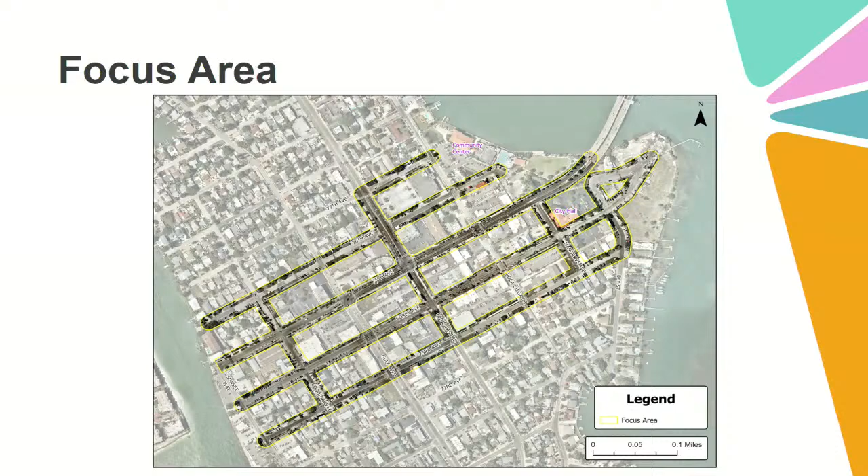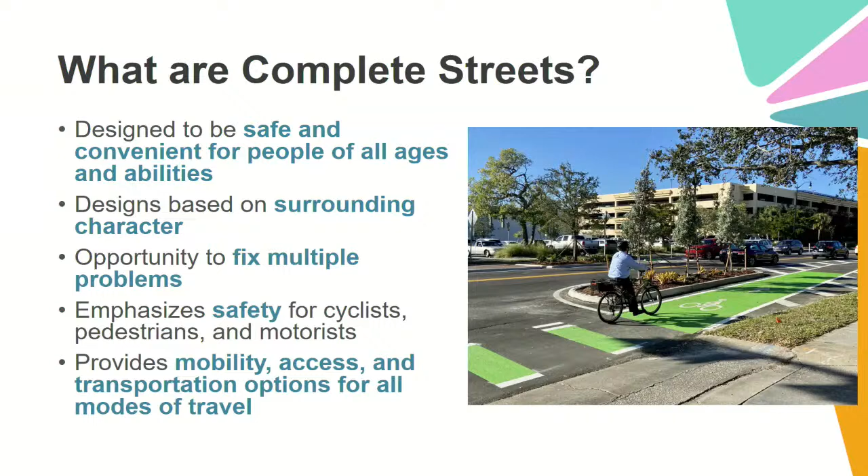Let's see, what are complete streets? So complete streets are just, they're safe and convenient modes of travel. We're looking to prioritize safety, particularly for cyclists and motorists and people of all ages, so the elderly or families, anybody who might be traveling on a street. Make it more cohesive, not just for vehicles, but also including vehicles in the safety as well.

Our project schedule, we started in December of 22. We worked through 2 community workshops so far and 2 stakeholder workshops to get resident feedback. And then we're finally at the point where we're drafting these final recommendations. We're looking to take this to the commission probably around December or January of next year.

What we've heard so far from the community: particularly on local streets, they would like slower speeds or traffic calming, more 4-way stops on these local streets, particularly on Coquina Way in our project area. They were requesting more 4-way stops, more dedicated bike routes, bike and scooter parking, improved sidewalks, and then more on-street parking, which I think is an issue that spans the whole of the island, but in this area too it came up.

And also something that was interesting that came up was more native landscaping. After the most recent hurricane, a lot of the landscaping got wiped out due to the salt water, so they were thinking more resilient landscaping that could stand the test of time.

So one of the deliverables that Kimley-Horn provided to us is a complete street toolkit, broken down into 6 different areas: the streetscape, the pedestrian, intersections and crossings, bicycle and micromobility, roadway and traffic calming, and then placemaking.

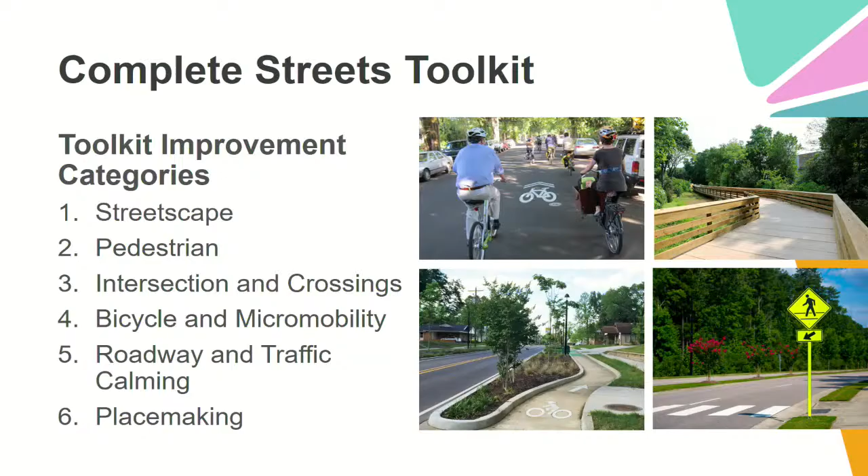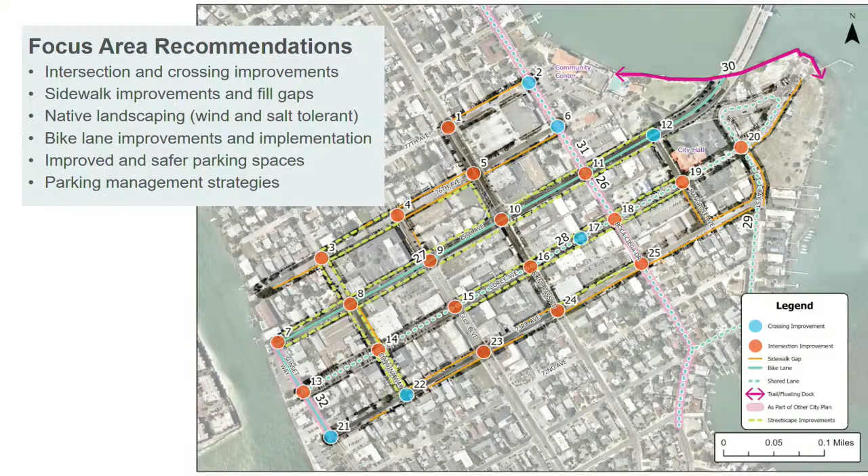They gave us a map that focuses all of those recommendations onto the project area. So most of our intersections need improvements. A lot of our sidewalks need improvements, things that you would expect to see. But they also gave us some interesting ideas for placemaking and landscaping where we could add strategic complete streets ideas to really make the streets better for everybody.

So now I want to go into the street concepts. That's the handout that I have for you. We tried to make templates that could be implemented on any of the streets in the area.

So what I have for you is this concept for 73rd, Corey Avenue, and 75th. But you don't need to think of them in the context of just that street. Think of it more as this idea could be implemented anywhere on any street that has a 60-foot right-of-way or an 80-foot right-of-way. So it's not that the plan will only be applied to Corey, or that we're looking to go out with a shovel and start digging up the roadway to implement this exact plan. It's just a high-level concept.

So the first one is 73rd. Our existing conditions on 73rd: we have 5-foot sidewalks on both sides, 12-foot travel lanes. We have some 90-degree parking existing in the right-of-way, so it's actually in the city right-of-way, though some people do have driveways and off-street parking. We have 36 existing parking spaces, but many of those block the sidewalks that exist.

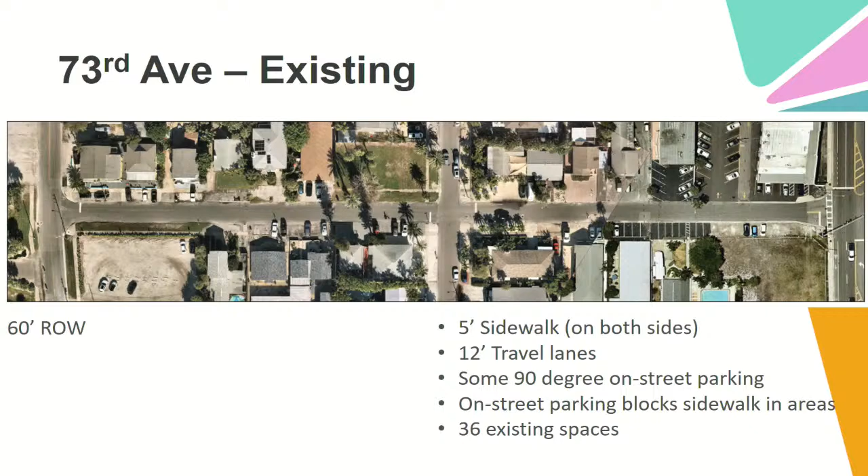So the first option is a two-way street concept for 73rd Avenue. This keeps it two-way like it is today, but it formalizes the on-street parking that exists. You can see that we actually gain 2 spaces by doing that, so we go from 36 to 38 spaces. We also ensure that those are up to code, so there won't be cars hanging into the roadway or blocking the sidewalks.

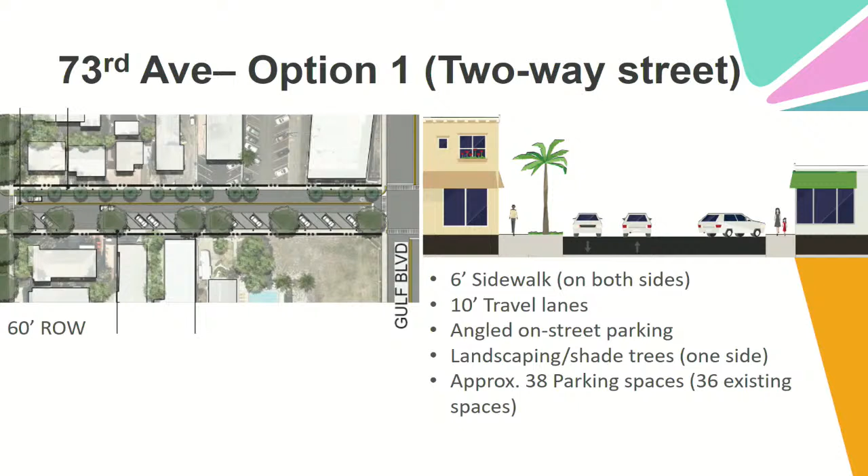It'll improve mobility overall. The second option we have is a one-way street. We did a lot of asking around when we proposed this option to the community, and we've gotten generally favorable feedback, some negative, some positive, but overall people are curious about it, interested in it, and it seemed to be well received. This takes out the extra lane, reducing the travel lane to one 10-foot lane, and adds more on-street parking, so we go from 36 spaces existing to 54 parking spaces on the roadway. We also gain, with this option, a two-way bike lane.

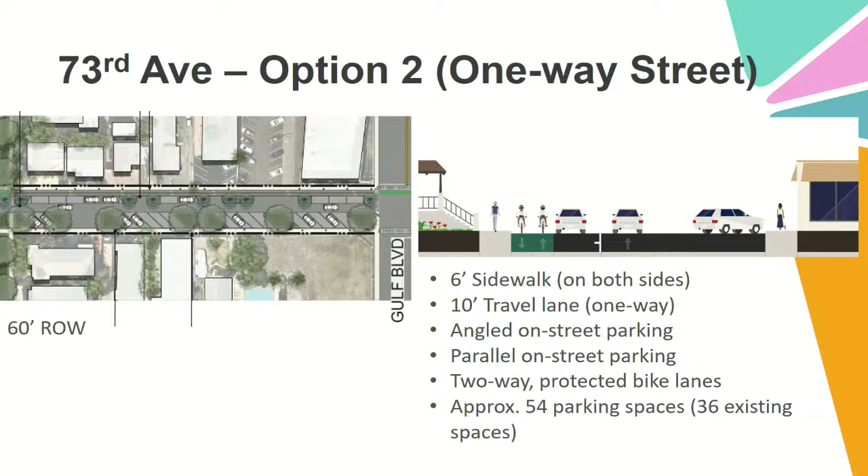So before I move on to Corey, do y'all have any comments on the 73rd Street concepts?

Have you talked with anybody who lives on 73rd about the concept of the one-way street? I mean, adding that many parking spots seems like a no-brainer. I'm not sure we've had anybody from 73rd come to the meetings particularly, but in general, the community that has shown up has been favorable to it. But definitely that's something we would reach out to the community on that street about, to see how they felt before we changed anything.

Absolutely. It would also be part of one-way pairs, so 73rd, say it goes west, 72nd would go east, so you have a one-way pair going in both directions. That means we could probably gain more parking across all of those streets down to 68th if we formalized all of that right-of-way parking.

Are these residential units on either side of this? Primarily residential on 73rd, yes. Those are hotels. Are you anticipating carrying the same plan, once adopted, on both sides of Gulf Boulevard? I know if it's one way going, carry it all the way through.

So this only looks at 73rd from Gulf Boulevard to Sunset Way. We wouldn't be looking at doing it on the eastern side of Gulf Boulevard, just on the west side. Does it make sense, even if you're not going to do it now, to continue that going—our ultimate goal being that's where it would go in a future development phase, having it be one-way all the way down? Yeah, we could look into that. Because otherwise you've got people going, whichever way they're going, getting to Gulf Boulevard and having to turn someplace. Yeah, that's true. Okay.

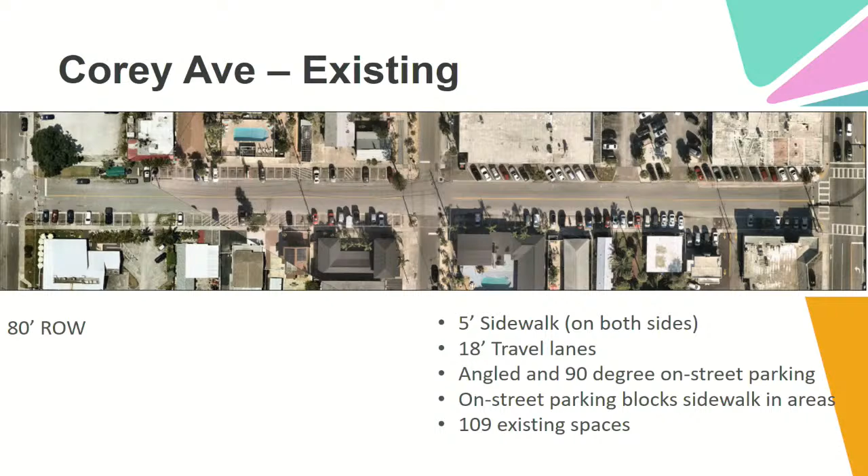We currently have 109 parking spaces. The first option is a mix of parking. We looked at the context of Corey Avenue pretty closely, thinking about where businesses are located, what kind of uses they serve, and where they might benefit from cafe dining space, or if they need as much parking, and when they need it.

So we came up with a mix of parking that has some parallel spaces, mostly angled spots, and does offer some cafe dining space to businesses that might be able to utilize it. Unfortunately, on Corey Avenue, no matter what we do, we're going to lose parking because what's out there isn't up to code. So any changes we make, unless we leave it exactly like it is today, will lose some amount of parking spaces.

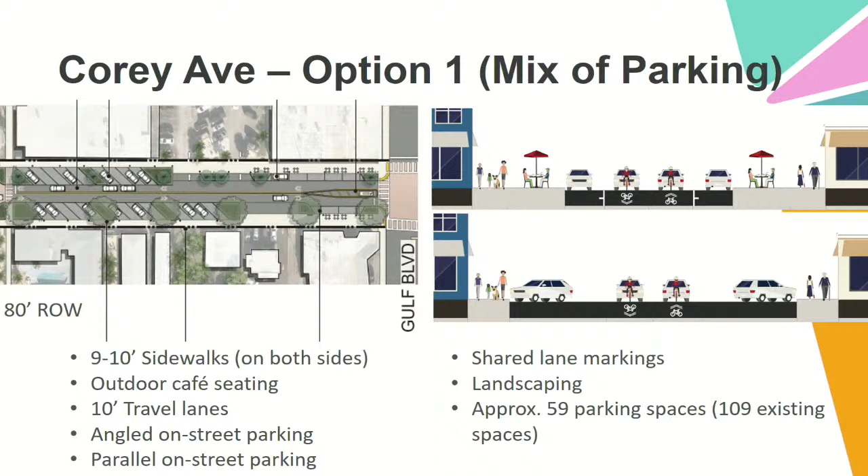So the second option for Corey Avenue is all parallel spaces. We've heard from the community a lot that they don't think we need bike lanes on Corey Avenue, because if we had bike lanes on 73rd or 75th, they could circulate around. So this option might not be applicable to Corey Avenue, but we've left it in here because maybe we could use it on 77th or a different street in the project area.

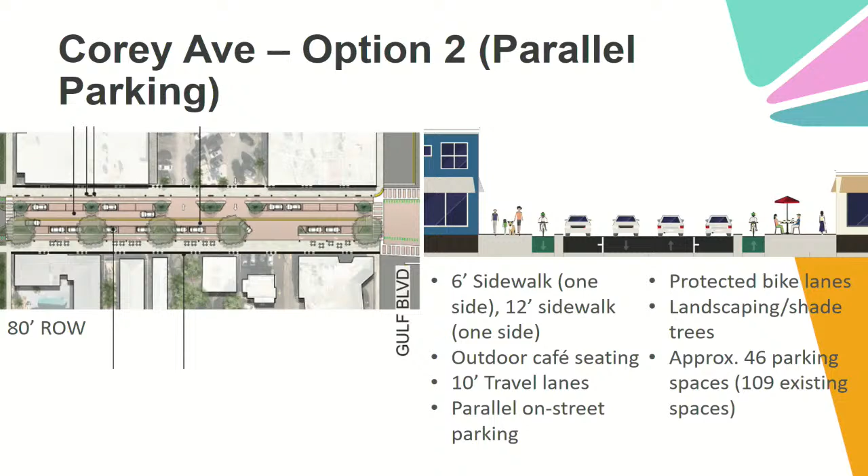But we ended up with parallel parking, wider sidewalks, and cafe dining space, and this takes us down to 46 parking spaces from 109. But we are adding a substantial amount of landscaping and green space. So any questions on Corey Avenue before we move on to 75th?

Yeah, I have one more question on all of these. Are you looking also at the current and future land use, by-right development, and what you can get with exemptions? Because a lot of these are smaller businesses, and the use of that property is underutilized today value-wise. Are you looking at it so that if some of those smaller multifamily or smaller residential properties get bought up, we go to two-story, with the bottom being retail, restaurant, that kind of stuff? Are you looking at the future so that we're not designing for today's use and looking down the road?

Kind of a mix. We did try to accommodate what's there now, but as far as parking goes for those kind of structures, they would have to come up to code and provide off-street parking if they were to redevelop in a significant way.

I was specifically thinking about wider sidewalks, that kind of stuff for restaurants, because Corey could very easily become all restaurants, pedestrian all the way through, and at some point it may not have traffic. Who knows, it's a future time frame. So would you suggest having the wider sidewalk continue throughout the whole stretch instead of narrowing down in certain areas?

It would seem we either address that today or put it in our plan for the wider future, so that we could cut the roadway and add that additional space in the future, to make it more pedestrian friendly.

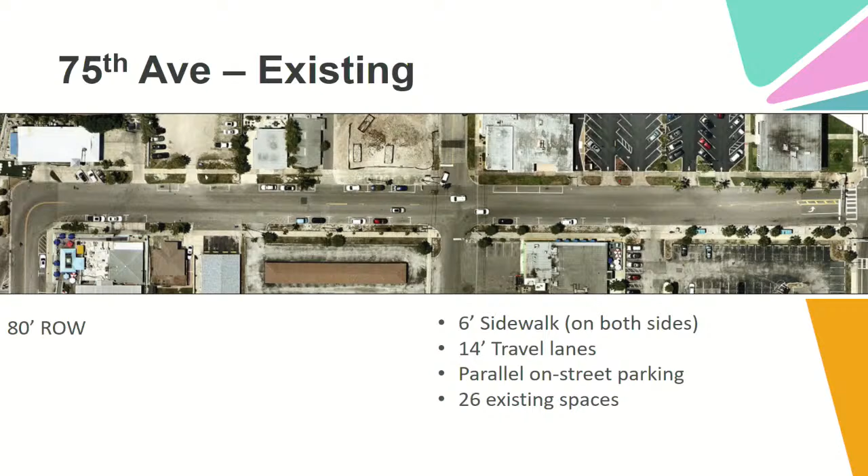So our first option is pretty similar to what's out there today, which is parallel parking. We just add a lot of green space, widen the sidewalks, and added a green landscaped median, providing a complete streets corridor for people to access that side of Sunset Way and 75th. We also add wider sidewalks, 8 feet on both sides, existing is around 5 or 6, and we add parking spaces by formalizing the parking. We also heard a lot of feedback about buses being an issue on 75th, so we added a formalized bus bay, so buses can pull fully off the street and into the bay whenever they're loading and unloading.

How much parking do we have in the B of A parking lot that we contract for? And do we also contract for parking spaces in the PJ Shopping Center there? Do we contract for those also?

So we don't contract for the PJs one, no, but we have an agreement with Bank of America and Fit for Life, which is right next door. I think between the two, there's about 30 parking spaces that we utilize at different hours. So they set the hours that it's allowed to be used for the public.

There was recently a shared use agreement approved by the commission maybe a couple weeks ago for the 2 empty lots, one on the corner of Gulf Boulevard and 75th, and then the one just on the other side of Don't Tell Mama. So those 2 lots are potentially looking into being shared use parking lots as well. Oh good, and that'll add considerable parking for that whole area. Yeah, we're hoping.

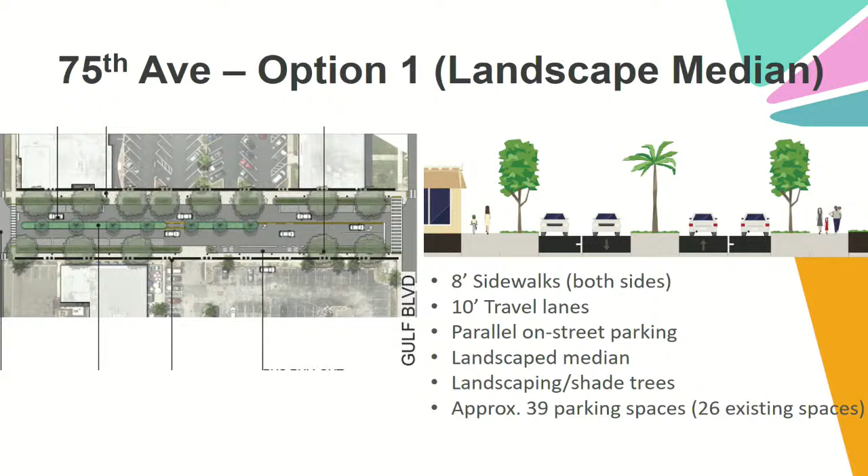The last option we have for 75th is very similar to the one before. It just widens the sidewalks a little bit, and rather than having the median, we included this option because there was some concern about access management for the various businesses, people having to do U-turns. So if you had a preference over having the median and people potentially navigating around those, or not having a median, we provided an option for both.

Just out of curiosity, has the block west of Gulf Boulevard on 75th, and the block north of 75th where Gulf Boulevard continues, ever been considered for conversion to one-way? I travel that every morning dropping my daughter off at school, and constantly the light will stop and eliminate the flow of traffic into St. Pete Beach from 75th Avenue just for one car to go through. There's almost never more than one car trying to turn left or head south on that one block, and it seemed to me, since we're already talking about other streets potentially going one way, that might reduce the inefficiencies of the current flow.

Like having 75th be one way going west, so you can come in on 75th, go straight through, or turn left on Gulf Boulevard, but not where those buses queue. The buses are most of the traffic that ever causes that light to change, so it seems like it's not really accomplishing much having eastbound. We had a study in 2015, I believe it was, where Blind Pass was one way.

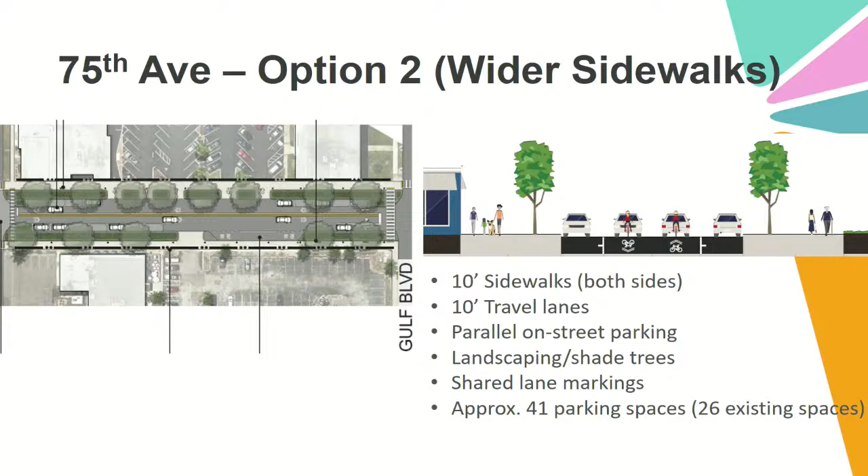There were some benefits to that too - turning right on 74th, turning left on 75th, then heading north, and doing the other, just that one block rather than all of Blind Pass. I remember that being a big discussion, because it would help the Corey Avenue businesses and have traffic actually traverse their street instead of just driving past it. The plan was to leave Corey Avenue both ways, so people could navigate it easily without issues.

So that's all I have for you. Our next steps are really just to refine these concepts based on the feedback you all provided and the feedback we got from the community, and then we're planning on presenting to the commission in December or January. Do you all have any other comments for me before we wrap up?

I think your idea about a center median on 75th makes a lot of sense, and one-way Corey makes a whole lot of sense too. But the one I had a question on that you didn't include was Sunset Way. We didn't include Sunset Way because there's already some plans going on there tied around the Fisherman's Park restoration - plans for a raised median or raised intersection at Sunset Way and Corey Avenue, and design plans for a sidewalk that goes from Fisherman's Park down Sunset Way and onto 71st.